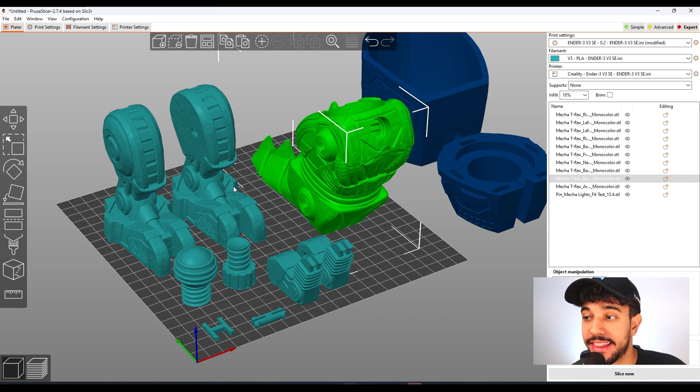So let's start off with this part right here on the build plate. As you can see, this is the back of the head and the front of the head. We're going to be printing them on a different build plate.

All of these files are going to be printed at 10% infill, gyroid infill, and these two are going to be printed at 5% infill. That's why we're printing in different plates. We would be able to fit all of them on a single build plate, but it would be really cramped, so we're going to be printing on different build plates.

So let's go to the print settings. First off, layer height. We're going to be printing this model at 0.2 millimeters, the standard layer height. This way we're going to get a good quality print and a fast print time.

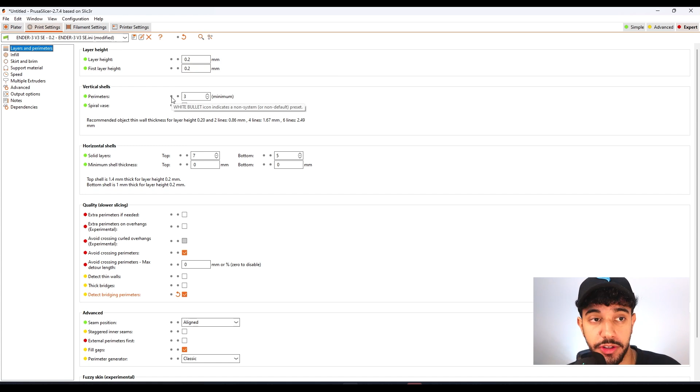Going over to vertical shells, we're going to be printing this model at 3 vertical shells so we can get a really rigid and dense model.

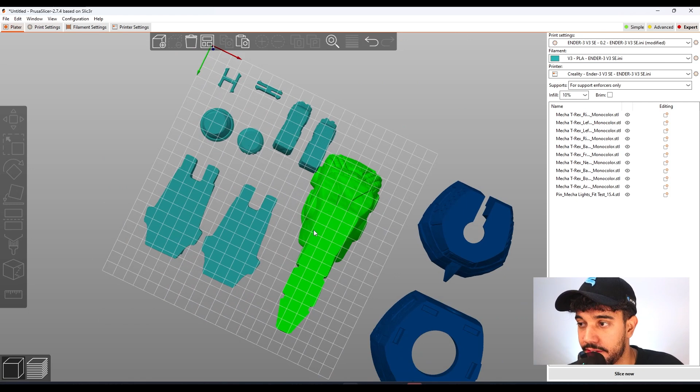Going over to infill, we're going to be printing all of these parts at 10% infill so we get a solid print. Going over to skirt and brim, this model only needs skirt, it does not need any brim, because all of the parts got a good surface area of contact to the build plate. If you have some bad adhesion issues, I do recommend always cleaning your build plate with some isopropyl alcohol or detergent, just so you can get a good, nice print.

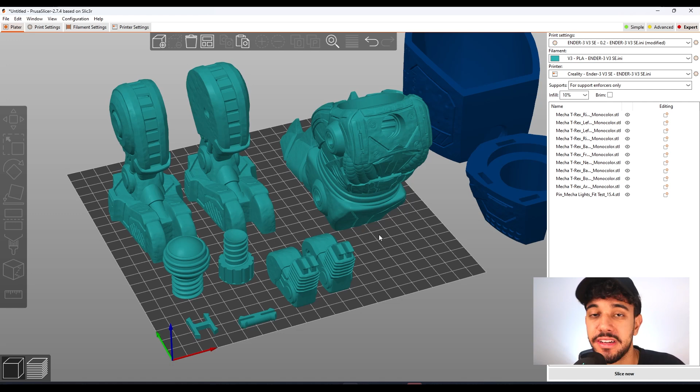By cleaning your build plate, you're going to remove all of the dust and oils from the build plate that impact bad adhesion a lot. So always clean your build plate and make sure it's well cleaned so you can get good bed adhesion, because if you don't, the first layer is not going to print correctly. Your filament is going to get a little bit slippery on the build plate, and that's going to make your prints unstick and fall during your print. So always make sure you clean your build plate.

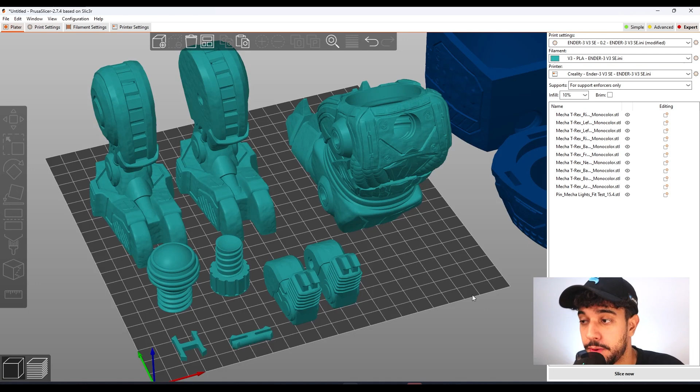Going back to the print settings, on support material, in our tests we did not print with any support material, but we found out that on this screw, this kind of bridge, sometimes for beginners it's well recommended that we add some paint-on support just to make sure that we get a good print.

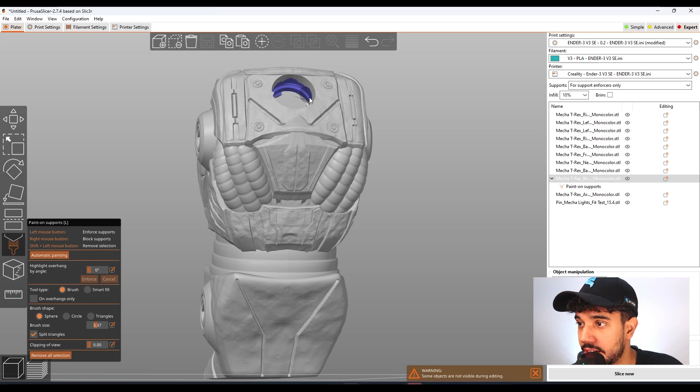So let's paint on some supports right here just to make sure we get a good print. If your printer is not too stable, or you have a lower end printer, I do recommend printing with some support, but you can print without any support too.

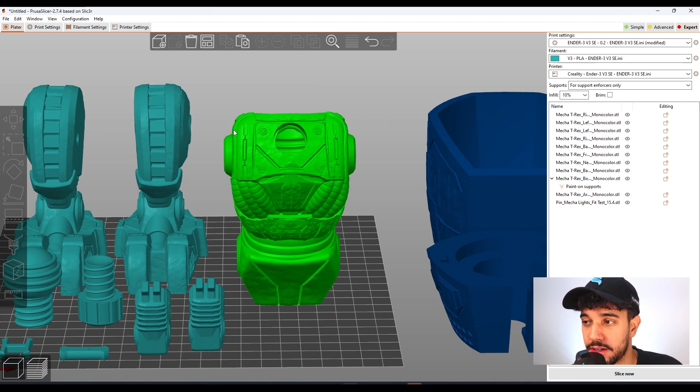So here we're going to go to the print settings and generate support material. As we have painted it, we do not need auto-generated support material. We're going to be selecting organic style, which is one that builds lots of branches.

The grid is well recommended for flat surfaces, so it's going to print a support that holds a lot of flat surfaces. Snug is a type of grid, but it's just more snug. Organic is well recommended for organic parts, with a lot of curvature and things like that. So organic is perfect for this occasion, it's going to build branches and support a lot where we have painted.

On top, interface layers you can reduce to 1 just to make sure it's easy to remove. As this is a bridge, it's not going to support a lot, so you can select just 1 to make sure it supports but is easy to remove. So this is perfect, we do not need to change any of the values.

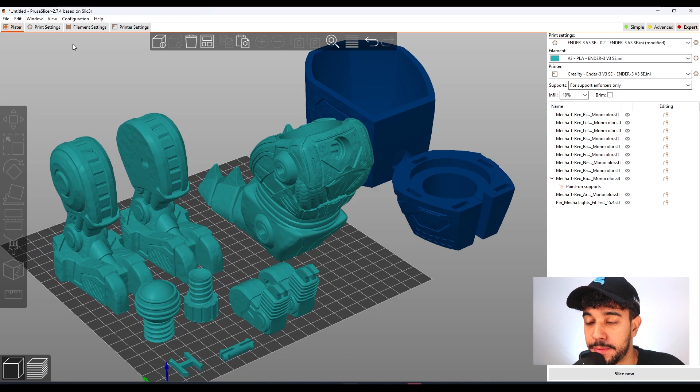Just make sure that your first layer is at a low value, because the first layer is the most important layer. If your first layer is not well printed out, the other layers are going to go on top of this one, so you got to guarantee a good first layer.

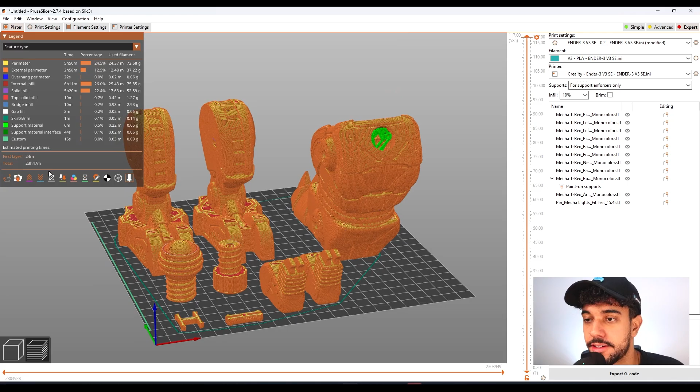So now let's just slice and take a look. As you can see, we have sliced and this looks quite nice. It's going to take 23 hours and 47 minutes to print. All of the layers are going to be printing at 10% infill with 0.2 millimeters layer height. So this is nice, we have added some custom support right here.

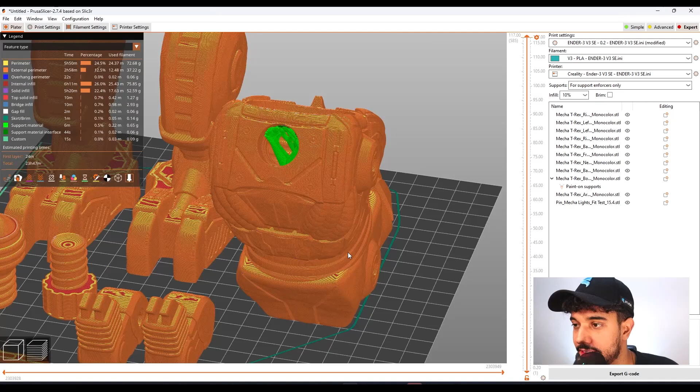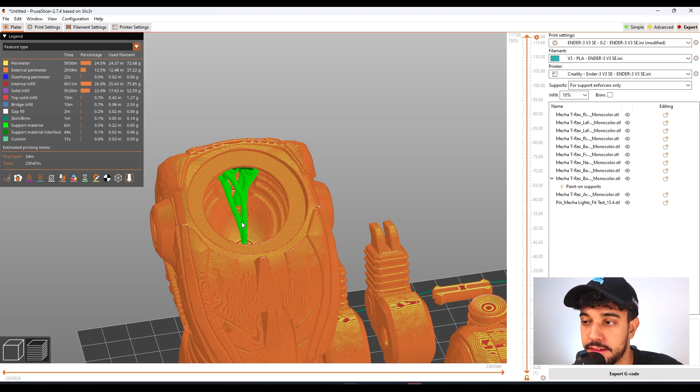This looks fantastic, as we have selected not only on build plate. Because if you select on build plate only, it's only going to print from over here until this high up. As we have not toggled this, it's going to start being printed at the model right here, so this is quite nice. It's going to support a lot of this bridge right here. You're not obligated to select this on high-end printers, you do not need this, but I would recommend it to get a good result.

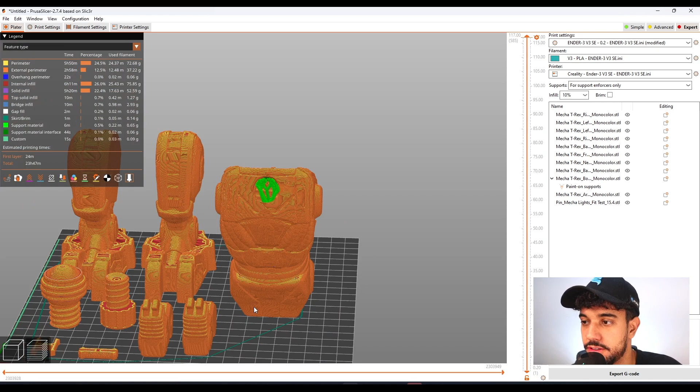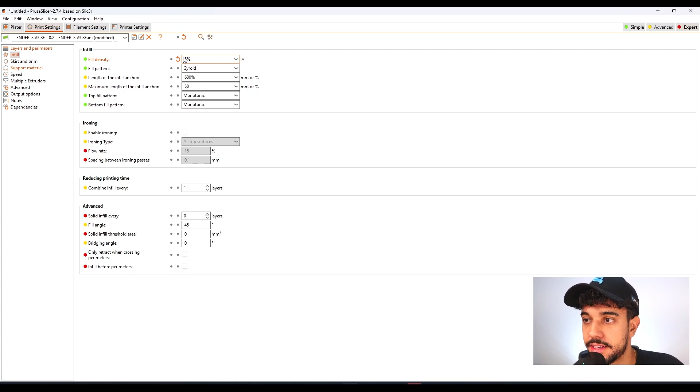So this is perfect, let's go to the other part. As for these other parts, they can be printed with the same print settings as we have shown. We're just going to be untoggling support, and right here in infill we're going to be decreasing to 5% just so we can save a little bit of extra filament on these bigger parts.

So let's just slice and take a look. As you can see, we have sliced and it's going to print really nicely with a 5% infill. So grab a really nice filament that you have laying around and print this model.